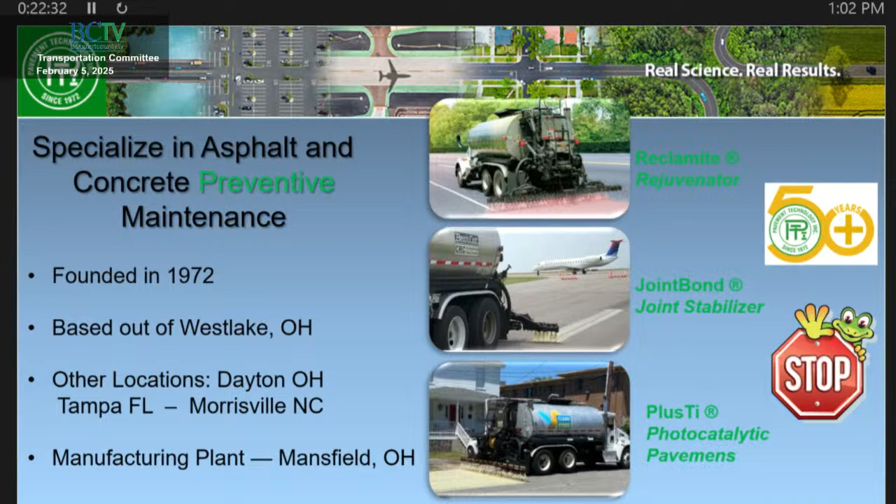All right, so myself, my name's Ken Holton. I was a city engineer for 24 years. I handled streets and drainage for a little town called Tampa, Florida. Pavement and asset management is just a big piece of what I had to deal with because I had a lot of inventory in a small space, and it was all urban. I had very, very little rural infrastructure.

My agency had decided before my time that they were going to be involved with pavement management and development of those tools, so we were a partner with the development of Paver. That was the Department of Defense, Federal Highway Administration, and then airports around the world, as well as some of the municipalities. And from way back in the mainframe time, in our case, you could only house about 5% of the network.

So I've been involved with pavement management. I grew up with it in my time with the city. And then a guy you probably know, Richard Turner, he kind of wrangled me in to help rewrite this roadway maintenance guide for the American Public Works Association. So I'm one of the contributing authors for that.

We all know the pavement deterioration curve, all right? But if we start with this curve and you think about what is the worst way to manage your asset, well, it'll be from the bottom of the curve. And Tim, down the bottom of the curve, full depth reclamation, are we at $40 a yard? 40 to 50. All right, so if you think of every little 3x3 patch of pavement that you have, if you were to manage it down here at the bottom of the curve, you have to spend between $40 and $50 just for every 3x3 spot. That's crazy.

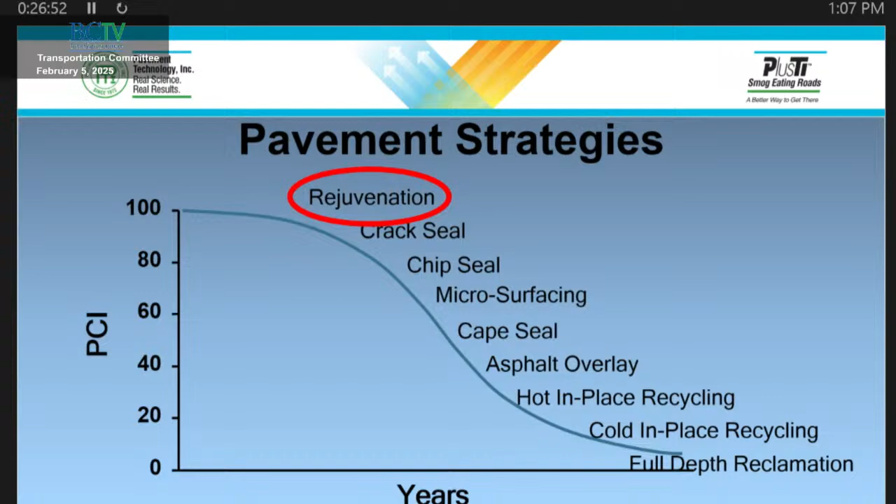Asphalt begins to deteriorate at the plant. We know that. And actually, it's deteriorated a little bit before that, because we're trying to recycle some of the aged material back in and try to reclaim some of the binder that's still useful. The aggregates are still good, but you still have to recoat them, and then we're trying to make up some of the old binder. What's interesting about asphalt is it's plastic. When you heat asphalt, asphalt will move. That's one of the characteristics.

That's why we can put it through a paving machine, and then when it cools off, you can drive on it. But being plastic, it goes right back into this drum right here. They heat it up, and then it recoats the rock. You add a little bit more asphalt cement to it, and then you're hoping to get some reclaimed asphalt cement out of the old RAP that's in it.

And what DOT, what's the percent you're allowing here? 30? Do you know? Not sure. Okay. So some DOTs and some agencies will allow 40, and they're trying to go 50% RAP. And I'm seeing those pavements show that they're already 10 years old in less than 1 year when we do binder testing. They just are so hard and so cracked. They're not holding on to the rock like they should.

So in South Carolina, we're seeing, once you get above about 20 to 25%, you really start to see a hardening effect of that asphalt that's not desired. All right, but that's what's happening here at the plant. At the plant, you're also above 300 degrees, and you're starting to drive off the magic word, maltenes, which are the glue inside the asphalt cement.

We put that nice road out there. We love it. It's doing great, but it's going to oxidize. Some of those oils are going to escape the roadway. Some of those oils are going to convert into asphaltenes, and what's supposed to be the glue of the asphalt is going to start getting out of balance. When it gets out of balance, that's when you start seeing distress to the pavement: cracking, weathering, raveling. It's as simple as this process right here to put those maltenes back in.

All right, so there's an emulsion in these trucks. The material has to have a dye in it. So it has a pink dye in the material that Brian's been using here in Beaufort County. That's a pink dye, a very manly dye. We love it. And what it does is let us know that all those nozzles are working, that we're covering the road in a fairly uniform fashion, which is what we need.

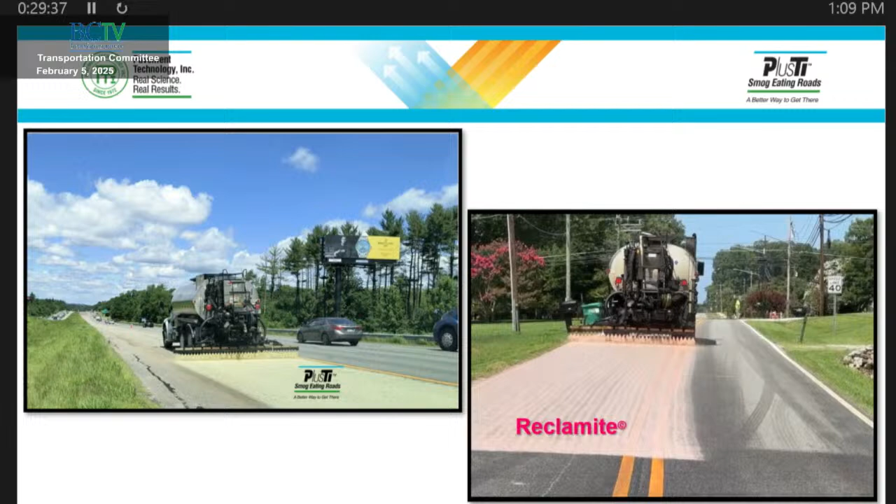And then that pink color does go away quickly as the material penetrates the roadway. The titanium dioxide material is actually yellow. And again, it's just a quality control effort so that we know it's working. And in this case, we're treating shoulders of a major highway.

So maltene replacement technology was developed in the late 50s. This is kind of a quick history lesson. Developed in the late 50s by Fritz Rostler. What he was trying to figure out was, asphalt binder has held up for years and years, like thousands of years actually. Some of the old Roman roads actually had some asphalt in them, and some of it was still there. It wasn't all just cobblestones. You found some asphalt there.

But what he asked was, why are our asphalts aging? And what are the components in there? Because it's mostly rock. Why is it coming apart? And what he found out, by separating out the binder part, was that there were these light oils and resins that do deteriorate over time, and they're called maltenes. So when they oxidize, that's when you start getting distress of the pavement.

The purpose of maltene replacement is to put in what's lost, not dilute what's left. So we don't want to just soften the asphalt. We want the asphalt to, yes, be a little bit more resilient, more flexible and adhesive, so that it can bend, it can be a little softer. But we want it to be durable. We want it to stick together. We want that glue to be in there. And the glue in asphalt is maltenes.

Right, and we found that in many places, in my own program as well, if I treat the road early enough, the road stays in great shape longer, and I can actually treat that road 2, 3, even 4 times, depending on how well that road was constructed.

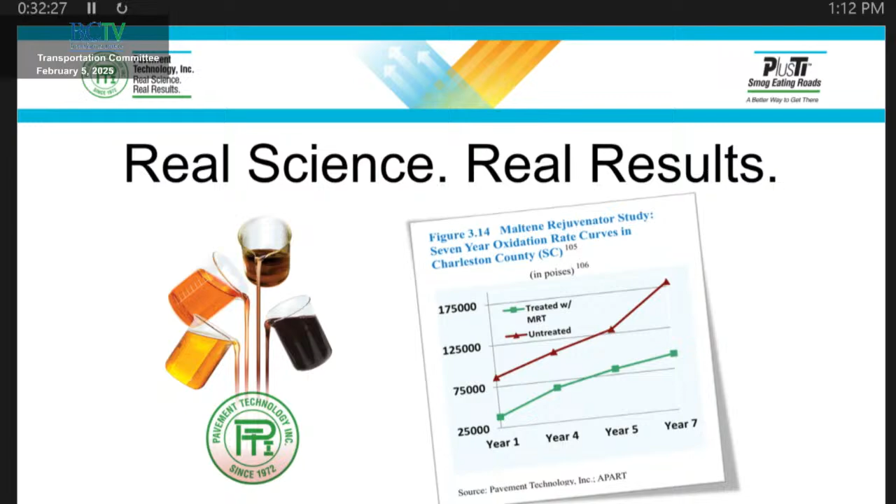What the green line is showing is we quell that steepness of the curve. We slow that deterioration down. We push the curve out so that you have a much better road longer. What does it look like to you when you drive the road?

So think about the oxidation, think what's really taking place inside the crack of the road. I'm going to show you, everyone's familiar with van surveys, these are vans that drive down the road with fancy cameras and crack mapping equipment. This is what you're going to see here.

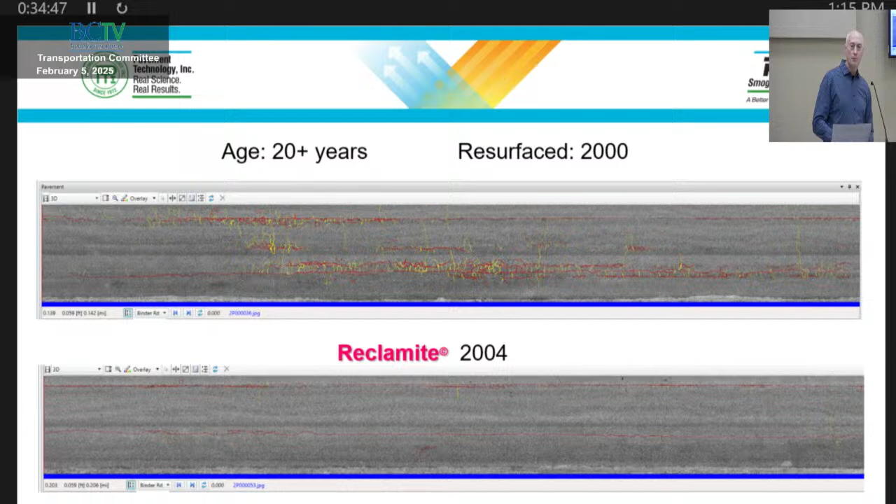So the county actually saw this, and just under 1 year ago, they resurfaced this road. I said, there goes my test strip. And they said, that's okay, go put another one out there. So in December, we put another test strip out where you see this one. So we're going to just repeat this process again. But this is what it can look like, slowing the deterioration curve down, just by something simple as a preventive maintenance.

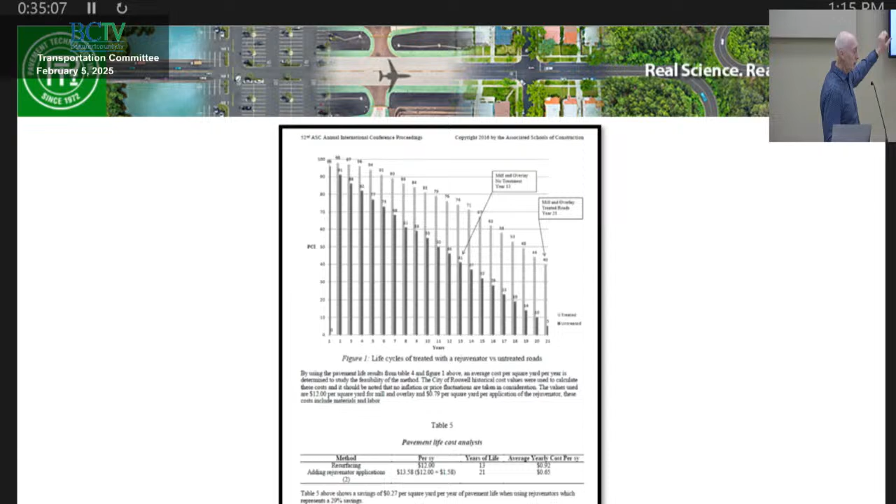One of my customers, Joe Vitale, he is in Roswell, Georgia. He was getting his master's degree. This is the resultant page, the real meat and potatoes of his master's paper. And so what he noticed was his roads, he'd pave them, and they would deteriorate along this line right here. He'd get about 13 years of life from paving to having to repave it again.

If he did preventive maintenance, and that was it, reclamite, and he did it at year 1 and year 6, so 5 years apart, he would follow that curve at least out to the point where he measured it, and then he estimated it would drop off after that.

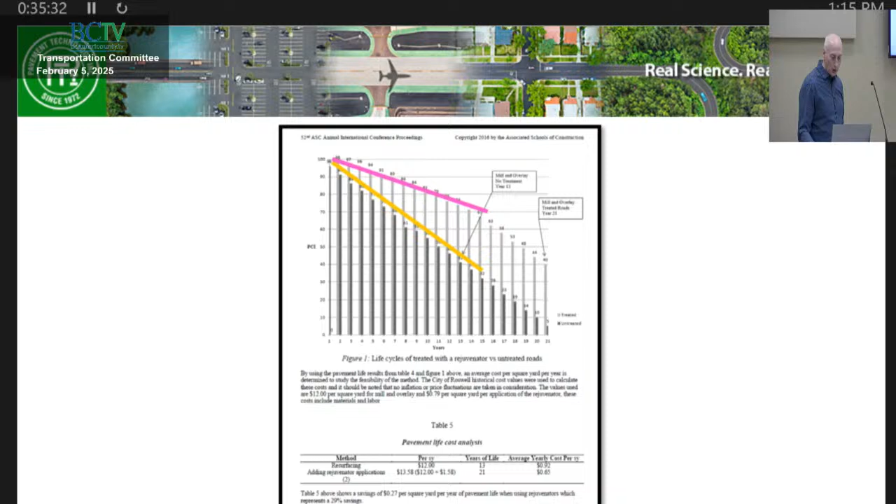What Joe did was not just look at the deterioration. He said, let's look at the numbers, let's look at the numbers, we want to know where the value is. So he added up all the numbers, divided by the number of years that he was getting, and what he found out was, and here's the big key, his operating cost of that roadway went down 29%.

He was saving or extending the life of his roadway so well that he was getting a 29% reduction in cost. So without the material, let's say he was having to spend $1 a square yard a year, now he's only spending 29% less, what would it be, 71 cents a square yard a year. All right, so that's

basically what Brian's going after for you guys. How can I lower my annual operating cost per square yard of my road on average so that I can fall within the budget or not need as much budget?

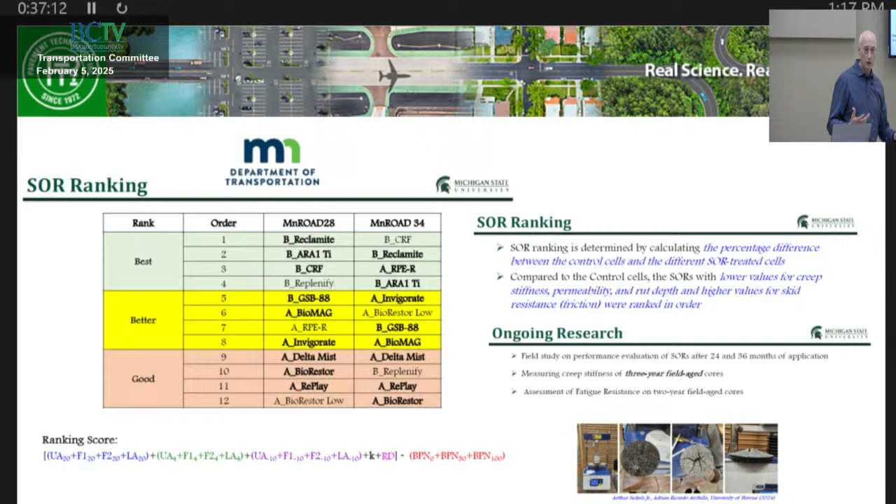There's been a lot of product testing. A lot of companies want to come out and say, hey, we have a rejuvenation product, and so there's a lot of testing going on. This is from MnROAD. What they found out was everything that's up in green, that's a maltene type rejuvenator, and those tend to do very, very well. If you're not a maltene type, at some point you're going to accelerate the aging and actually age faster than an untreated piece of roadway. So be very cautious of what you use as a rejuvenator. But what we found out was Reclamite and our ARA stuff that we're going to talk about today, they actually perform the very best out of all the products.

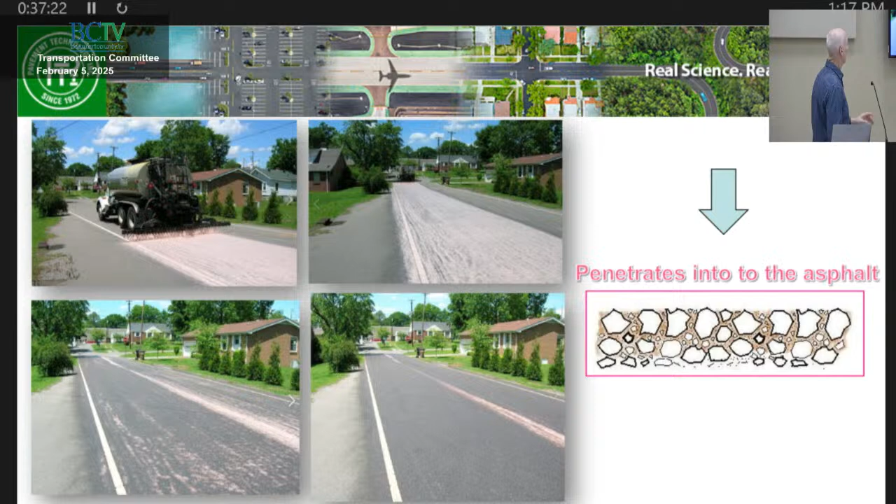In theory, if you see us working, it's going to look something like this. Our truck runs down the road, it penetrates into the roadway. Pink turns to translucent, we don't obliterate the markings, so you don't have to restrike the roadway. That material goes right into the roadway, nothing resides on top for very long. Once that process happens, we put a light aggregate down, and then we sweep that aggregate up, typically the next morning.

So this is kind of the whole process, usually done process-wise. You want to go back to slide 10? Yes. So talk a little bit about the bottom right picture.

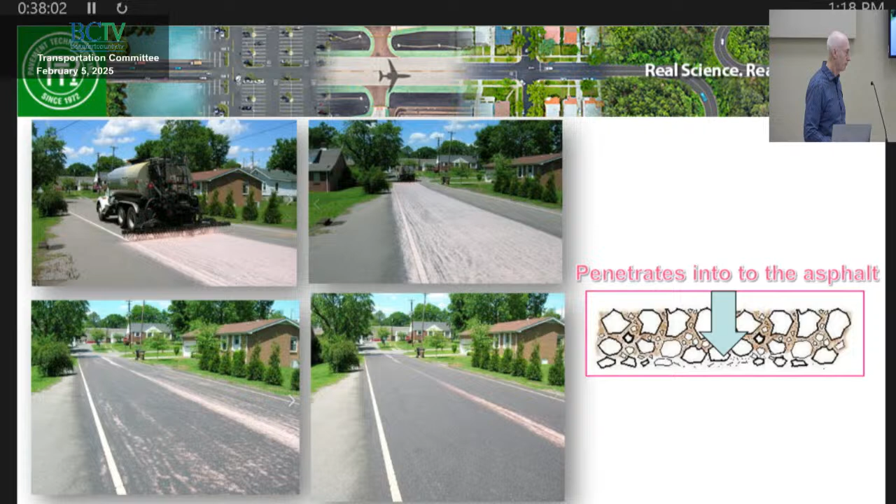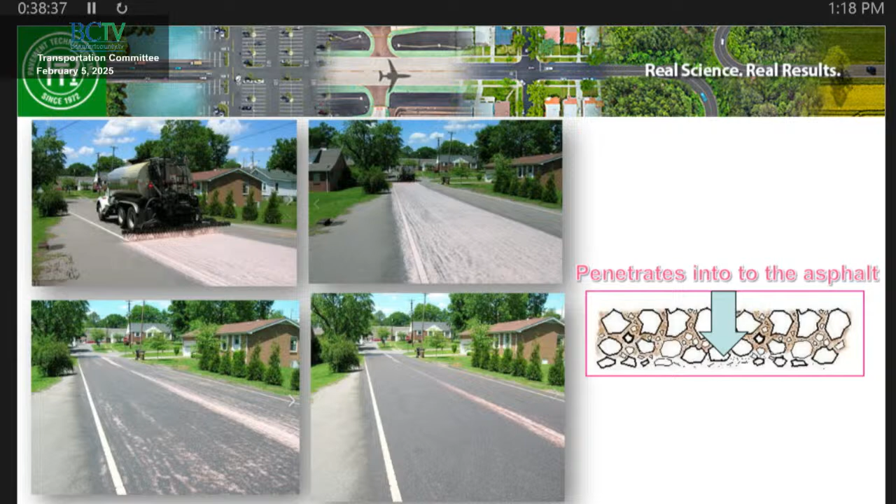Good question. So on the center line, we overlap that center line, that is the paving joint, that's the weakest piece of this pavement. So our protocol is overlap the center line, and that would be the last area where it got hit twice. We put more material into that center line. Typically, if I let it go, you can see it's already quickly absorbed on that center line. We do try to overlap 1, 2, 3 feet in that center line area, and that's why joint bond was actually developed.

So that's our whole process. We sweep it up the next day, and that material will leave the road a little bit darker, but within a couple of months it's going to gray back out to its original color. Again, there's nothing to rub off or wear off, or cause an eyesore for any period of time.

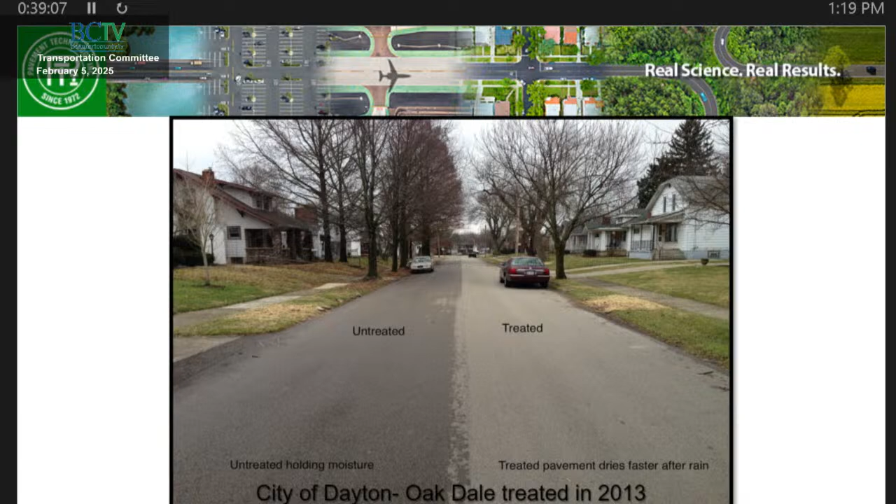What does it look like over time, what can you expect to see? This is a road that was paved, half the road was treated, you can see on the left the moisture hanging out. So basically it's a penetrating sealer, the material goes in and basically swells or rehydrates the asphalt, it makes it dry quicker. That's part of, not the only reason, but part of the reason why you get less deterioration.

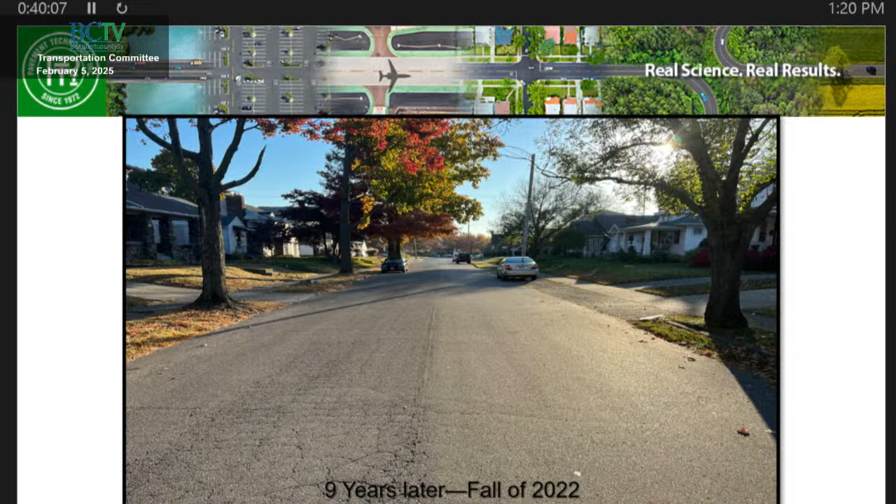Fast forward 9 years, can you see the age difference on this road? This side's pretty bad, needs to be redone. The other side is actually showing some distress after 9 years. This roadway was in pretty bad shape, I think it was going to fall apart. There's something going on here, because even a Reclamite treated road should not have that kind of distress after 9 years. But you can see, even though there was a problem, by doing some preventive maintenance, you don't have that problem over the whole road. And if you do that wholesale around your paving program, then you have a better chance of saving some of the roads that might have had an issue to start with.

Here's another one, there's a series of 4 pictures, 4 sets of pictures. This agency didn't have enough money to do the Reclamite replacement everywhere, so they did some, and they lost their funding after about 10 years of the program. So after 10 years they lost their funding. This was around 2008, 9, 10, 11, somewhere in there, as the economic downturn finally caught up with them and they stopped the program. They started back up last year because of these pictures.

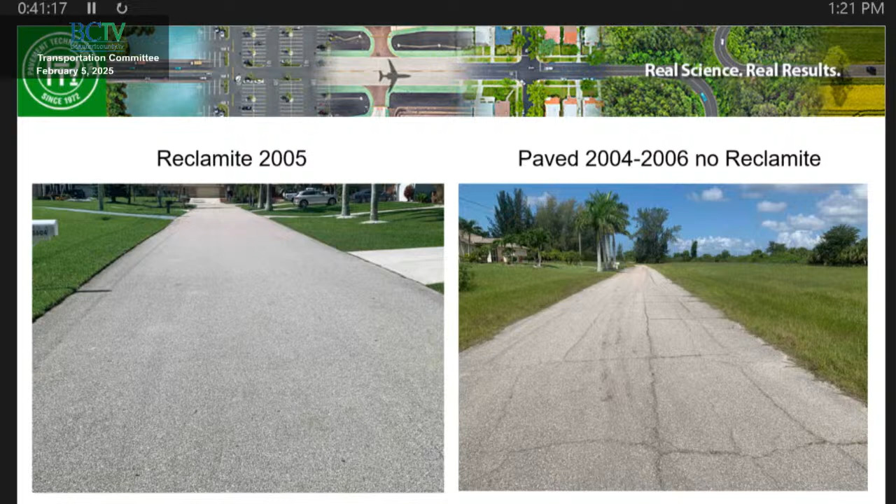What happened was they went out and said, oh my gosh, some of our roads that we paved back in the early 2000s were in really good shape. Did we work there? What they found out, the only thing they did was reintroduce Reclamite, they did preventive maintenance on the pictures on the left. Pictures on the right, same age paving, were already starting to show significant deterioration. Same thing will come a little bit earlier in life, next year or two coming forward. So you can see preventive maintenance versus no preventive maintenance, same comparison again. This is the last one - better condition where you did do some preventive maintenance, and not so good where you didn't.

This is kind of what we're going after. Not all roads are going to act exactly the same, but if you just have a way to do some preventive maintenance. My guess is everybody in this room did preventive maintenance today.

Did you brush your teeth? Yeah, everyone did some preventive maintenance. You don't want cavities, you don't want to take chances of anything going on. So you did preventive maintenance. You're going to do that anyway. And which teeth did you brush?

All of them, right? So for the most part, if it's asphalt, this material is going to help asphalt. That's kind of what I think Brian is going after. As much as he can, he's going to try, because we all know things happen. Every once in a while you might get a cavity, or you might need a crown, or you might have to do something. But here you are with your asphalt pavement. Not all things are going to act the same, but overall, a little preventive maintenance is going to go a long way.

Ken? Yes sir. The last time you were here and we talked about it, one of the questions DOT had was concern over surface friction after it's been done. I know the answer, but I'm bringing it up so you would talk about it. There was always concern about surface friction after it's done. So we are concerned about that, and the light aggregate that's there, this is a petroleum product.

Now, how many times have you seen it moved along? It will go, right? I mean, Buckwalter Parkway, it went half a mile, okay? So it looks like, I'll say it looks like an eyesore. You look down and you're like, oh my gosh, it's like tracking down the highway. What did we do? So it looks dark where the wheels are going.

Well, that's just picking it up and moving it along, so it's not there anymore to cause a friction issue. That's part of high volume - it just moves it along. But also, if you stop and look, you see a dark track, and you look straight down, you see right through it to the pavement below. It's not like a tack track. As soon as it rains, that just kind of dissipates pretty quickly. That, and more traffic. Does that answer well enough?

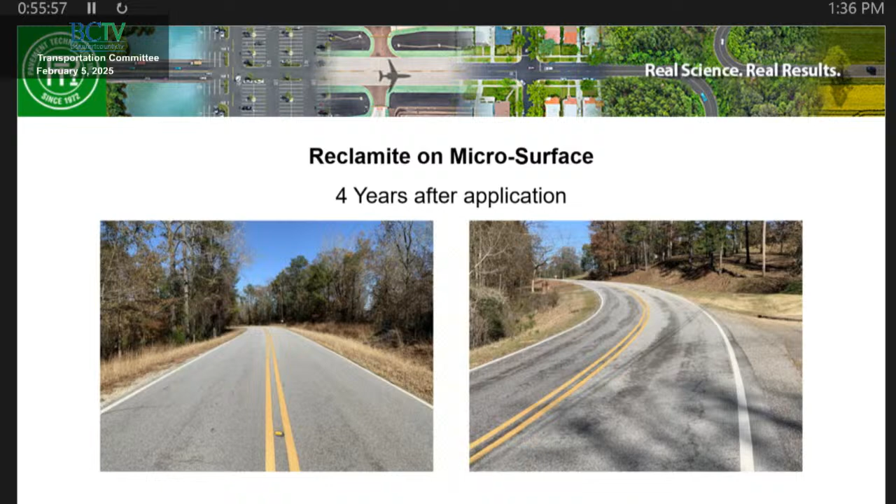All right, where can we put it? We can put it just about anywhere. We already talked about a lot of it, but definitely shoulders, rumble strips, centerline joints - it's not intended, without other treatments, for the travel lane of high-speed or high-volume roadways. But if the DOT would like to put it there, then we'll have to talk about it - that's a whole other project scope. We're happy to talk about it, but yes, sir - impact.

What's the best methodology? Reclamite is one of those tools that they're looking at, along with.

Yep, great segue, because guess what? Boom. All right, here we go. So here's some rumble strips. All right, so this is where you cut. Basically, you can see the paving joint here, on a very low, compromised, dense area, most likely of that pavement. And you can see right down, and I'll just walk over here. Right behind the machine. That's less dense.

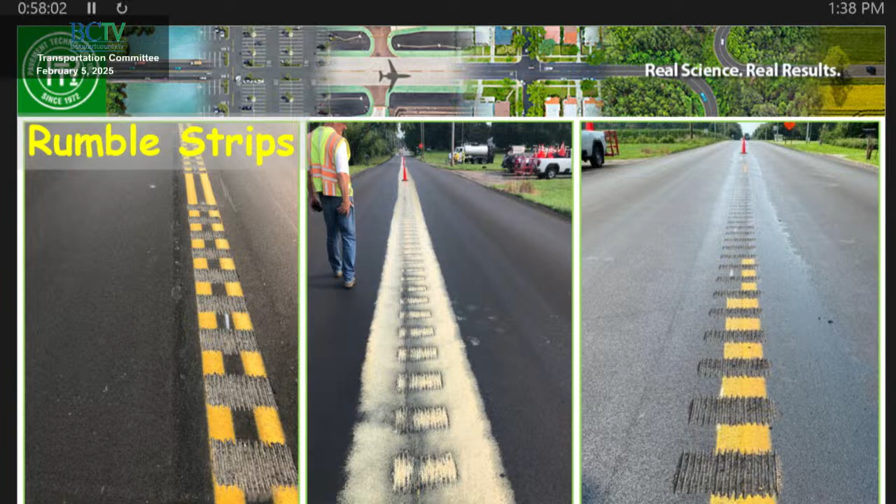All right, we worked with PPG and North Carolina DOT, and one of our goals was to find another solution, maybe a faster solution to get this down. So PPG, a big paint company, probably the largest paint supplier and markings manufacturer worldwide, wanted to make sure that what we do with our joint bond material, either on top of or underneath the markings, did not change the color value. Change the color value, you change possibly how people view the marking. It's yellow for a reason, it's white for a reason. So they wanted to make sure that we weren't changing some of the real characteristics that they needed,

as well as the reflectivity. So what we've done in a couple of different states, North Carolina is one of them, we put the joint bond material through a paint machine. For this short of a run, this is about 1,000 feet. We didn't have a long line truck come out. We did it with a hand liner. But what we did is two different areas. This was less than 30 days after the mumble strip was cut, the markings are put down permanent. So to a paint manufacturer, putting a product on top of a brand new marking is like sacrilege. So that's why they were out there with us, and you can see that's a PPG vest on the guy running the paint machine.

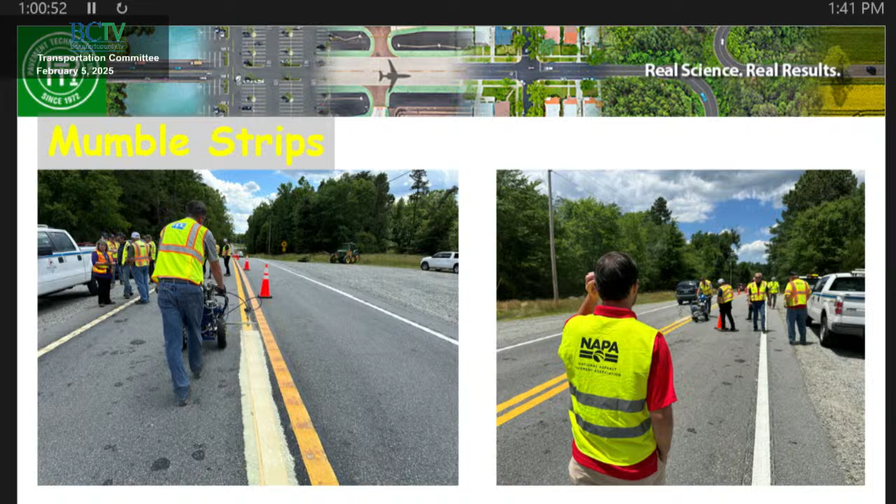What was very interesting as well was on this same project in a different area, we cut the mumble strip, we cleaned it, shot it with the joint bond, and then a couple hours later came back and shot it with the long line paint. And adhesion testing, they've got these little devices they put underneath the marking, and then they pull the marking to see how well it's adhering to the roadway. They actually found that the marking adhesion was higher in the joint bond treated area than in the untreated area. It surprised them. So thanks, Tim, for bringing that up.

So here's just a couple examples of what you can do. Joints, you can see the joint. Here's a joint that was treated, and you can see the weathering. The moisture's not penetrating or staying. Shoulders are a great place. Of course, we already know neighborhoods. Things you already do here are great places. Now we're going to start talking about the titanium dioxide as one of the other co-benefits.

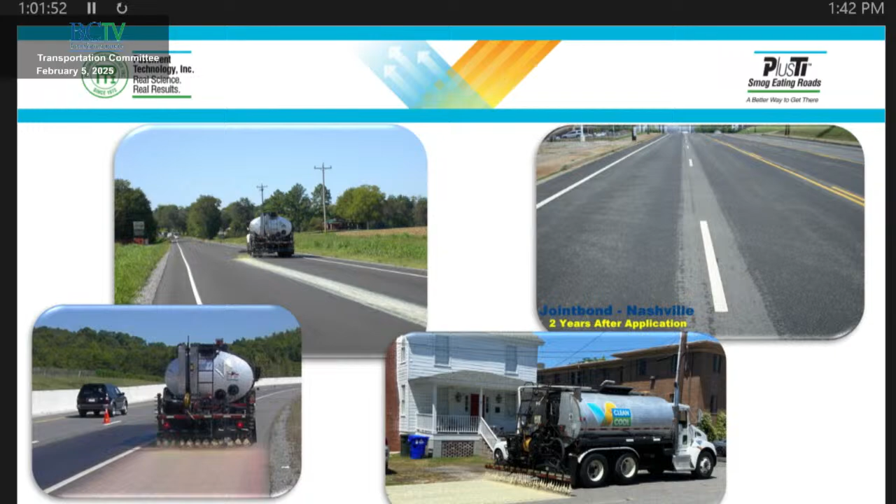So do you have any questions about markings? Y'all have asked some good ones. So thank you. I don't know if you're going to hear this, so I may just move on.

Because small forests can remove the emissions of thousands of cars every day, but we don't have room for forests where air pollution occurs. What if cities used roads treated with pavement technology? TiO2 is energized by light. Millions of electrons create an energy field atop the road. Pollutants are captured and oxidized instantly.

You like our commercial? All right. So this is kind of exciting. I'm an environmental engineer with a civil PE, and it was kind of funny when I came with the company. They knew me as the guy that bought Reclamite for the city, and I went up to the office and I'm like, "What's that?" And they're like, "Oh, that's a patent." I said, "What's the patent for?" "Well, it's titanium dioxide." "For what?" They were kind of coy with it.

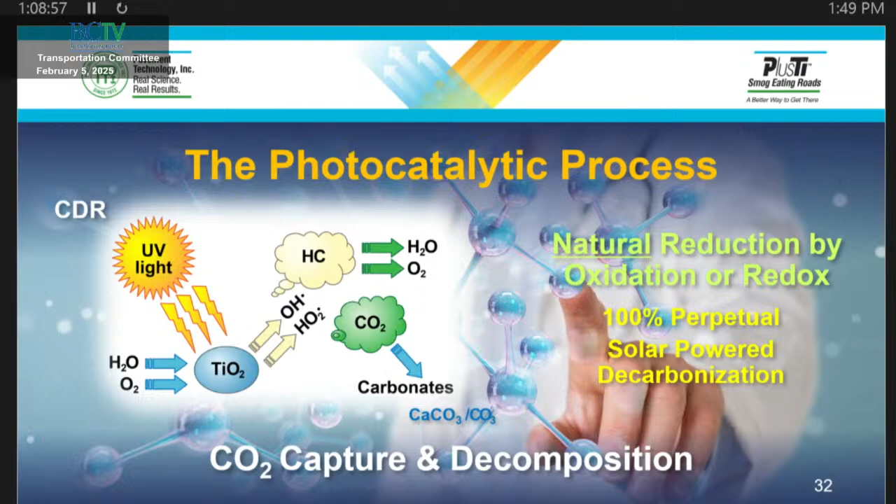So this is what's called an oxidative reduction reaction. All right? Y'all can go study it later tonight. But that's what's happening, is we are creating an oxidizing environment to break down the pollution that's there. All right?

All right, we developed it because I'm going to tell you, there were a number of things out there. I just mentioned on the overhead thing, but mobile source pollution, that was where we thought the market was most headed to. You needed vehicle emissions broken down. We have, I forget what the federal highway, it's a grant that most DOTs got. Basically, you did intersection improvements with it and things like that, just to keep traffic flowing, not sitting still.

Carbon reduction grant? Well, the carbon reduction, that's the most recent, but there's a congestion mitigation, whatever it was, that grant. All right, so that was doled out by the DOTs in every state. They got the congestion mitigation grants. So we thought this would be a great use of that funding source. Let's treat some of those areas where you can't, unfortunately, mitigate some of the congestion. You don't want idling vehicles sitting here, and we can clean up quite a bit of that exhaust.

What we found out in our research is that about 26% of all the carbon emissions were actually coming from our transportation. Okay, so there's other reasons that we have it: heating, electricity production, those kind of things. That's a big piece, even bigger than roadways. But just the roadways and transportation, airports, about 26% is coming from there. So that's where we can influence.

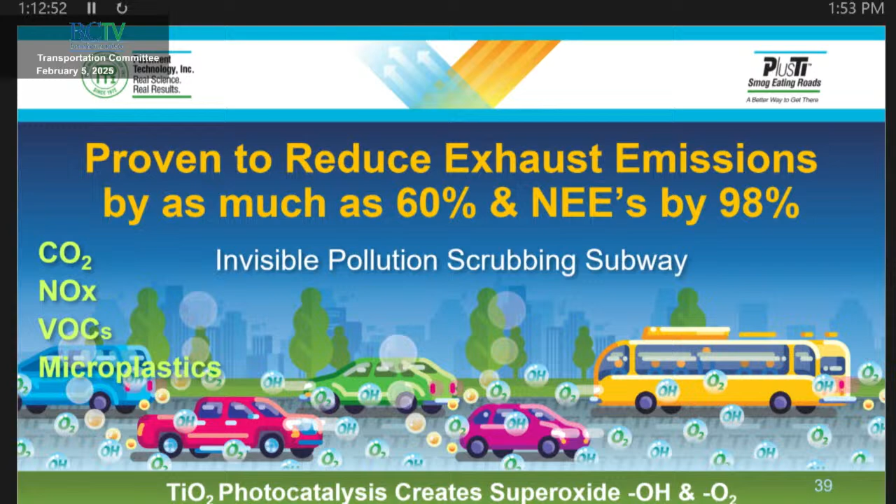So what if we could actually start not just mitigating the carbon footprint from the cradle to the gate, so from production to implementation in the field? What if we could actually go to what's called scope 3, which is unintended material coming across, or use phase, the intended use of the infrastructure, lowering the carbon footprint, lowering the pollution impact.

All right, so that's where our products come in. We have very, very low carbon footprint. It's like less than a kilogram per square meter. But we clean up many, many times that. We clean up tons a year per mile of that carbon.

So that's the research that we're doing. How much? We're quantifying those things. So we're looking at the use phase.

The big question comes, and Brian and I have been in lengthy conversations concerning the carbon reduction program that's funded through LATS, and that's where the money's coming from, not through DOT. The big question is, we're going to do 2 of our county roads this year with titanium. You have the contract for it. We'd like to do some of the state routes with the carbon reduction program, and I think we can get money to do it.

A good example would be 170 and 278. That intersection always has traffic backed up in it. And there's other intersections that we can pick throughout the county, or areas we can pick out in the county, on Hilton Head as an example. What do we have to do to get your blessing to be able to do this?

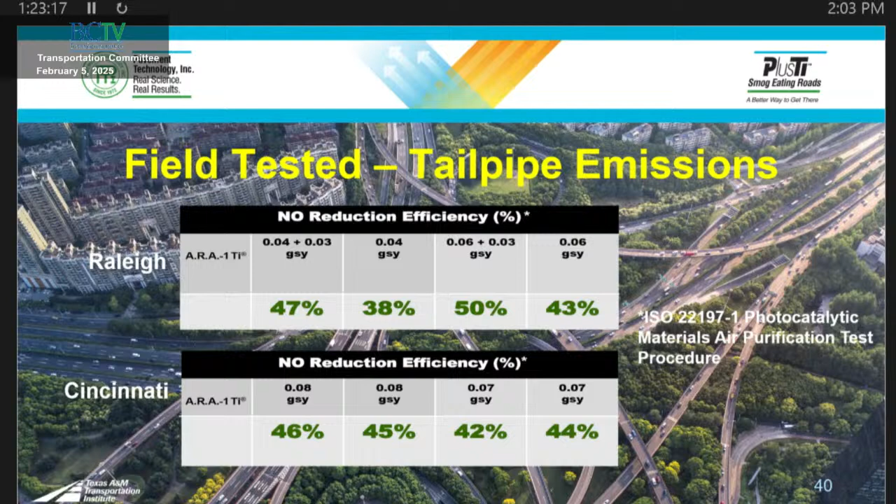Just like the maltenes, it's Mother Nature's way of taking care of asphalt roadways. Titanium dioxide is one of Mother Nature's ways of cleaning up the environment. So these are some of the results in Raleigh: tailpipe emissions were reduced in the mid-30s to 40%, up to 50%.

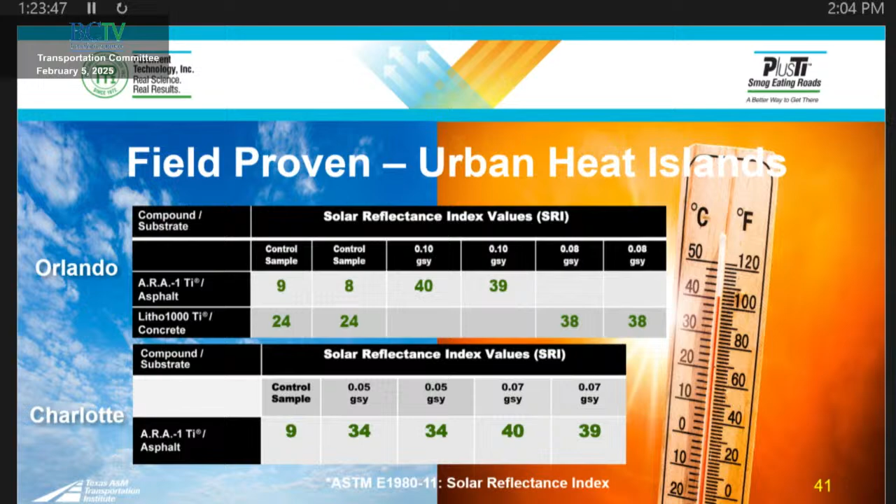Heat island, we've been studying this for quite a while. One of the targets here is a 9 and an 8 - that would be a solar reflectance index of a hot mix asphalt. You want to get above 29 to say you're influencing the solar reflectance index to LEED, U.S. Green Building Standards, or Institute for Sustainable Infrastructure, and we're getting into the 30s and 40s easily. So we're influencing the heat island effect in a positive way.

What does that look like? You have a roadway, it's a hardscape - the heat radiates in during the day, and then when it begins to cool at night, it re-radiates back out. With titanium dioxide, remember the chemical process? We throw an electron, and that's actually taking some of the heat. Energy is not created or destroyed, but it is converted - we're converting it into an expending of an electron, but we're also redirecting, because the titanium dioxide has a faceted face like a diamond. It's redirecting the heat out in many directions. So less heat's getting in to cause a problem during the heat island phase, or the nighttime phase.

You mentioned that it meets the ISI standards. Yes, so does this, for a roadway project. Yep, if you want to go Envision, we'll help you get there, because we're Beaufort County's Envision certified agency. We've already been part of a LEED building too, so look for that to be a growing market as people want it.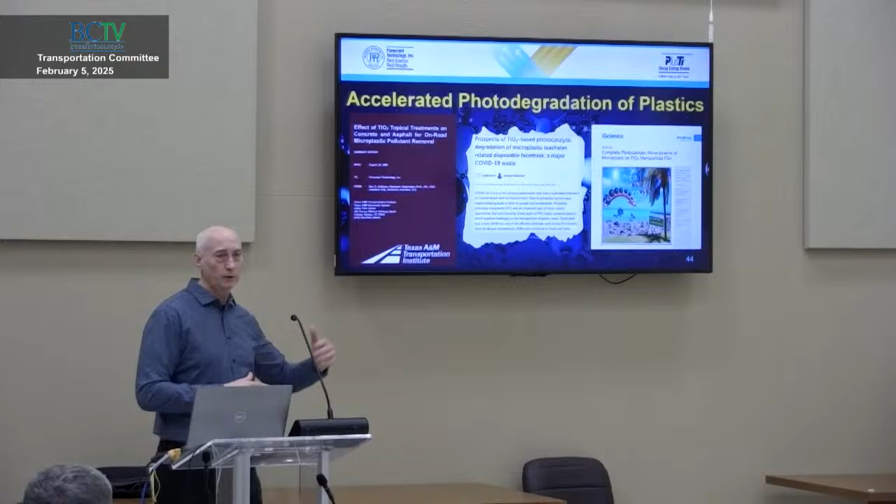These are just some of the things we're testing - microplastics. I'll show you some quick pictures. A big stack of tires is converted basically to nothing, and when you look at it under an electron microscope, you have these little spheres that get basically dissolved away. So it's beginning that oxidative process for the microplastic itself - it's kickstarting Mother Nature's process.

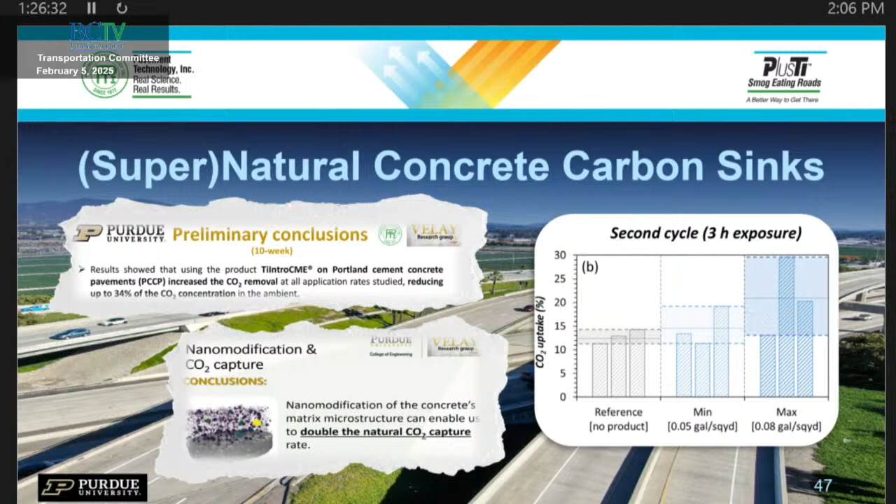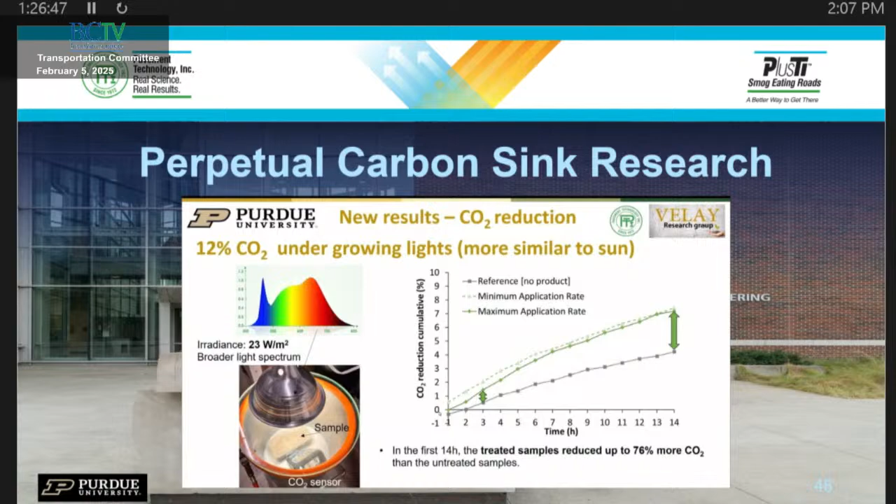Purdue is going to send us the link to that within days. It's not published, going through final review, and expected to be out in a couple weeks at the most from when I got the email. So it's been presented.

Preliminary testing - asphalt, this is concrete, right? They've already started testing asphalt, same results, very similar results for the reduction. So this is the first of many, many, many papers that are going to be coming out on the benefits. They're testing asphalt CO2 reduction, and also testing microplastics on concrete and asphalt.

They've got a rhodamine dye test, if anyone knows anything about that. Basically the rhodamine dye is put on the pavement, and if it starts to go away, it means it's being oxidized; if it doesn't, it's not. On a TiO2 treated road, it's going away - so that's a microplastic of sorts. This is coming out, it's very exciting. We've already been through what we do, very simple application, again.

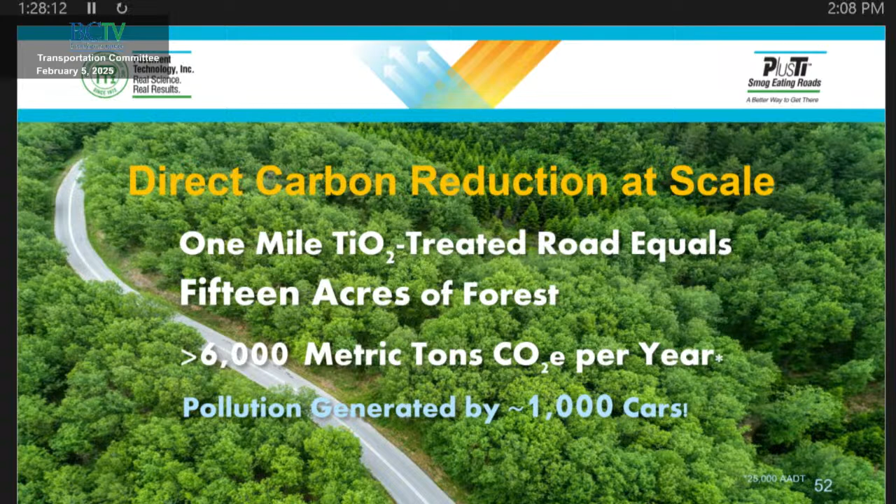It is a way to bring those forests into the urban environment. We have a whole set of products that we can help you with, depending on the use and where we want to put it.

It goes and penetrates in. This is the only reason I have this slide here: we're looking for a certain amount of material towards the surface, and then we want to show that it's penetrating into the pavement so that it's there as the pavement begins to age and wear away. So it's there, and it'll be sustained.

This is actually Greenville, the first one here in South Carolina doing the work. After 5 years, we still had 88% titanium dioxide retention. So it's there for a long time.

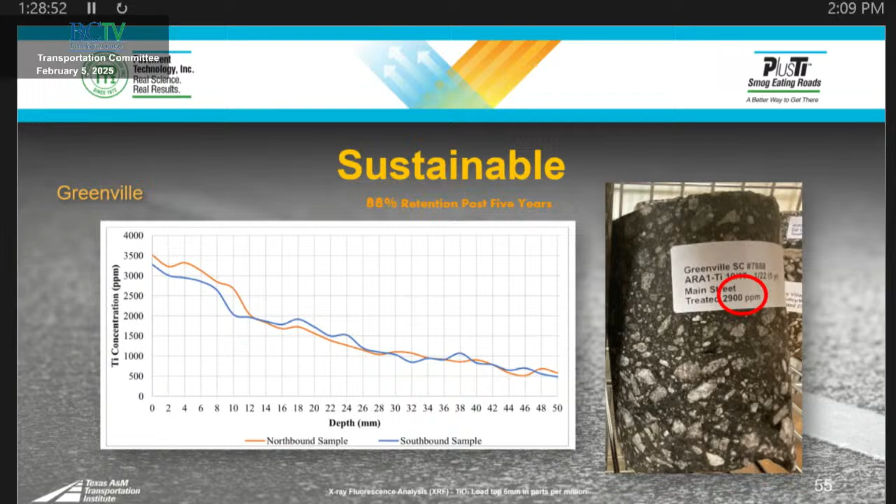Proof is there with all the excitement. On the EPD, we are fixing to publish our EPD, period.

We've done EPD, which is the industry standard, cradle to gate. We're into the use phase, which nobody else is. Because we don't want to just go cradle to gate, we want to go all the way to the end of life, to the grave. We want to show what we're going to reduce on the use of that asset. That's a whole lot more complicated for the industry to do calculations on.

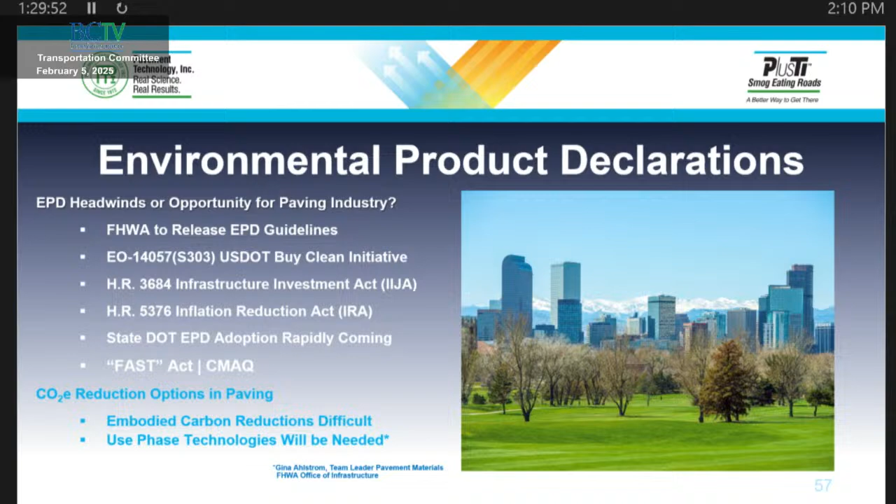It's taken us now about 1.5 years of going through all those calcs, but that paper I just showed you is being produced. That is one of the last nails in the coffin to get it done. I think you'll see our EPDs, not just for what it takes cradle to gate, but cradle to end of life, very, very soon, like within a couple months at the most.

Here's some of the agencies we work for. We do work for hundreds. This is Massachusetts DOT. MassDOT had us do shoulders going in and out of Boston on quite a few roads this year, I think it was 130 miles of their roads going in and out.

And this is one of the photos of what we do. We just keep the traffic off of us. Next year, we're going to start migrating out into that travel lane. They've already given us that project. I think we did a little bit of tunnel work as well.

So UV light in the lights in the tunnels will help oxidize pollution in a tunnel. How many tunnels? It's kind of where we're going with some of this.

So that's really it. Any questions on our titanium dioxide? Yes, sir. How much does the TiO2 cost add to the maltene price?

Yes, sir. How long does the application last? So longevity, the titanium—in Greenville, we still have about 88% of what we put in the pavement to start with still in the pavement after 5 years. So I expect it's doing something, it's still doing its job there, but I'm going to guess it'll still be doing something at the end of 10 years. You'll still be getting some benefits of it.

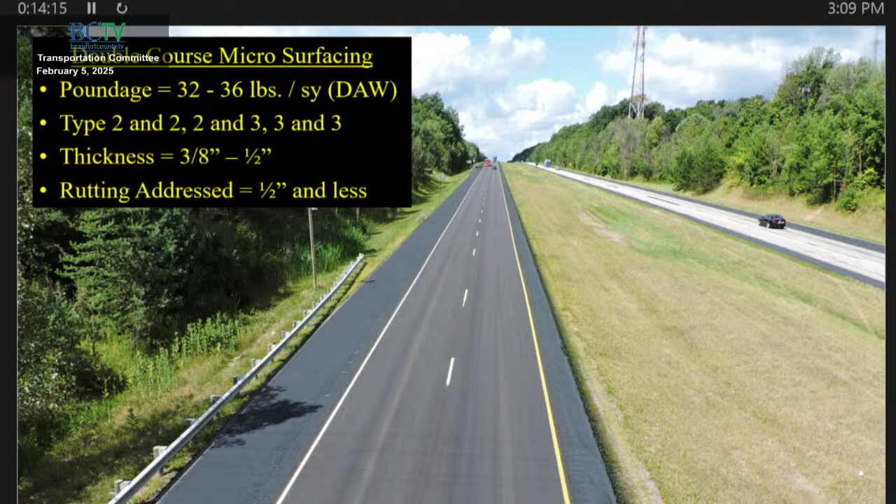So I think that doing it the right way, we start from scratch, we do it the right way, will yield what you're looking for in maintaining what you've just built the past 10 years.

Examples: City of Durham, I mentioned their program this year—like I said, 7 this year, 10 next year, 10 in 2027, 10 in '28. They're doing a bunch of maintenance.

They do crack seal. They do the polymerized chip seal as an interlayer for their cape seal. Single course microsurfacing—they put fiberglass in their microsurfacing for tensile strength. And then they do the cape seals.

So a lot of different varieties based on traffic count, based on having curb, based on not having curb. They have a van that goes in and shoots all their roads, analyzing distress, so they know where to put these things. And they have snow too—not a bunch, but they have snow.

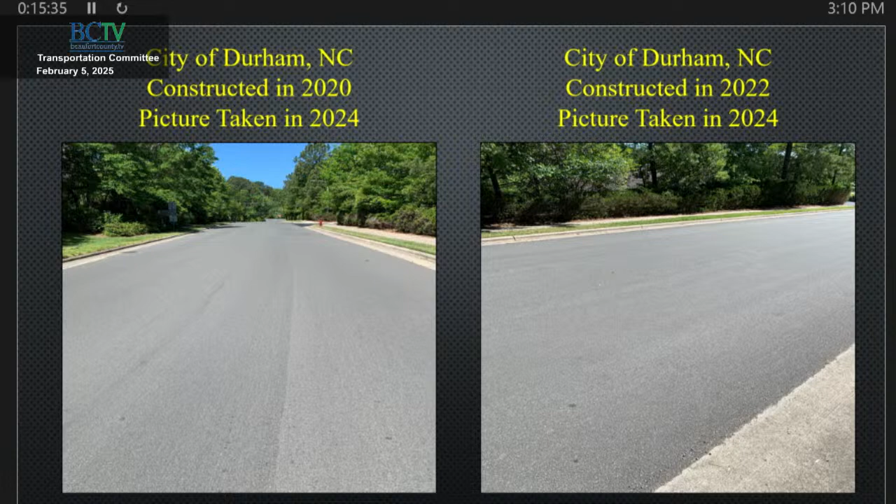With this, you do not have to mill. So we're basically feathering it right to the gutter pan. City of High Point had about a $1.2 million program. They did some single and double course.

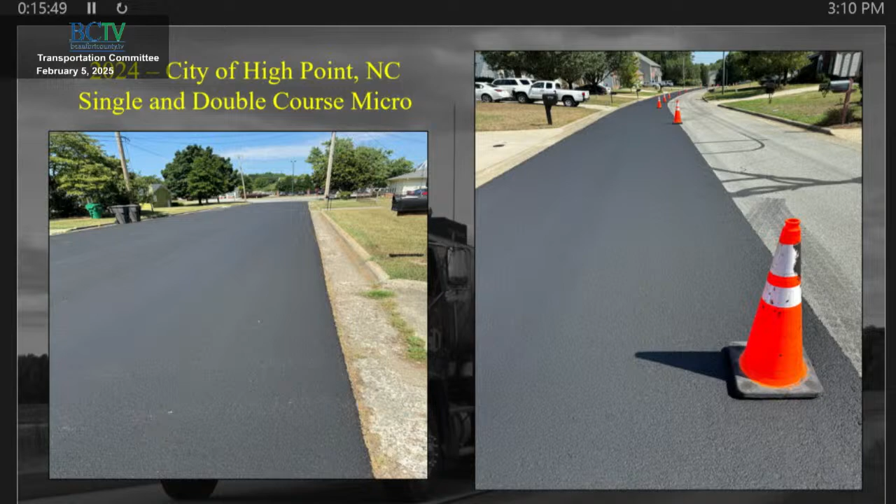City of Greenville, like I said, double course microsurfacing all over the place. NCDOT Division 1, every county in Division 1, which is basically from Virginia down the coast, received microsurfacing single and double courses constructed last year. Division 4 is over in Wilson County, went into the subdivisions with the type 2 aggregate and overlaid what looked to be old chip seals.

So the DOT in North Carolina has a lot of local responsibility. They take care of 90-some percent of the roads. That means subdivision work, kind of like you guys have subdivisions. So they went in and did a type 2 on the subdivisions and the type 3 larger aggregate out rurally in the field areas.

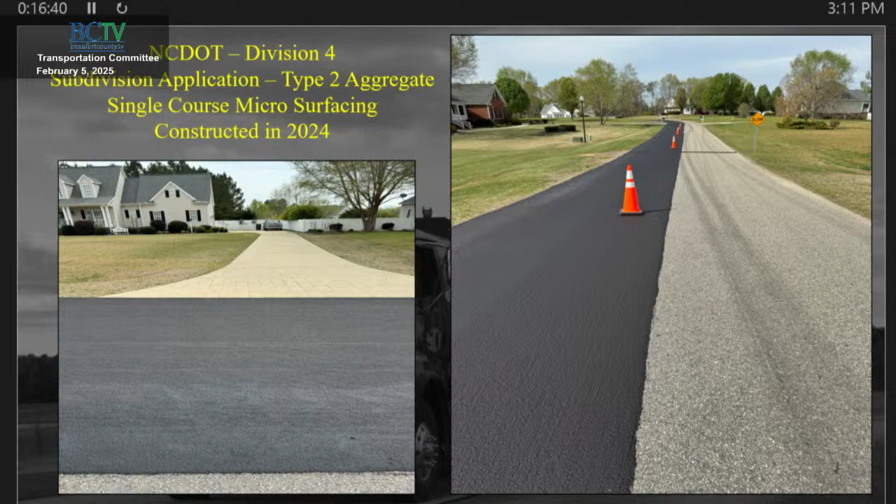Forgot about South Carolina. There's Beaufort, where we're going to go look today, on Toyota. And then going through, that was a couple years ago. And then out near the causeway, including the causeway. It's Rusty holding the sign, bottom right - I didn't get his fingers in there. So we've done a decent amount of microsurfacing in the county, and in my opinion, pretty successfully.

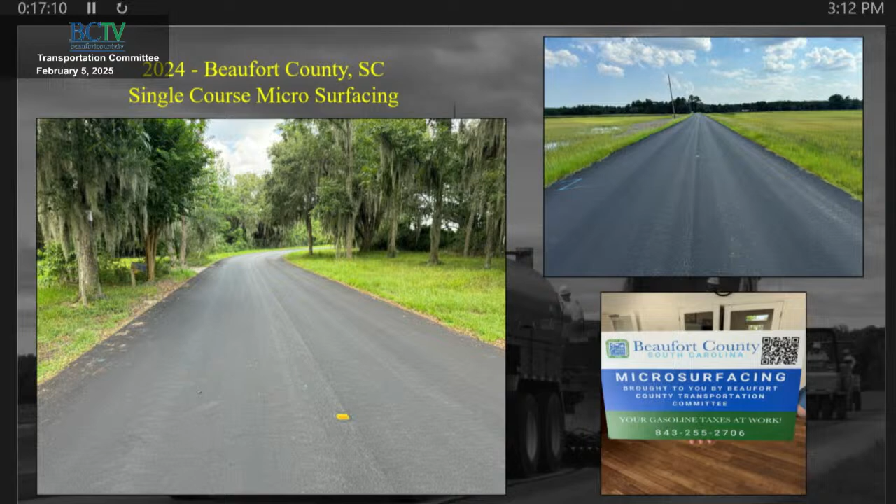And then at the state level, we started looking at doing double course micros, mainly because of their rutting. So we went in and leveled up a lot of their rutting. This year is going to be the biggest - it sold and we were the low bidder - biggest single contract for micro in North Carolina, in Division 10, which is to the east of Charlotte, Union County, around Monroe, and stuff of that nature. We're taking US 74.

And we're setting a rut box in the wheel paths. It's 5 feet wide, and we're filling up all the wheel ruts with micro, and then putting a double course over everything. 6 lanes, 3 lanes in each direction. Big project. But up in the mountains, Vienna Dozier Road, Division 9, double course, beautiful.

City of Greenville, South Carolina, basically at the technical center there at Clemson - this was what they call a high mod micro. It was initiated or facilitated through Ergon. We were the contractor to put it down, but it actually increased the latex modification from 3% to 6%. Looked like bubble gum going down. It actually slowed our motor down because of how thick it was, a couple, 3 times. But it drastically increased the price because polymer by the ton is as much as asphalt nowadays. So they're going back to the 3% and extending out where we stopped in this university area.

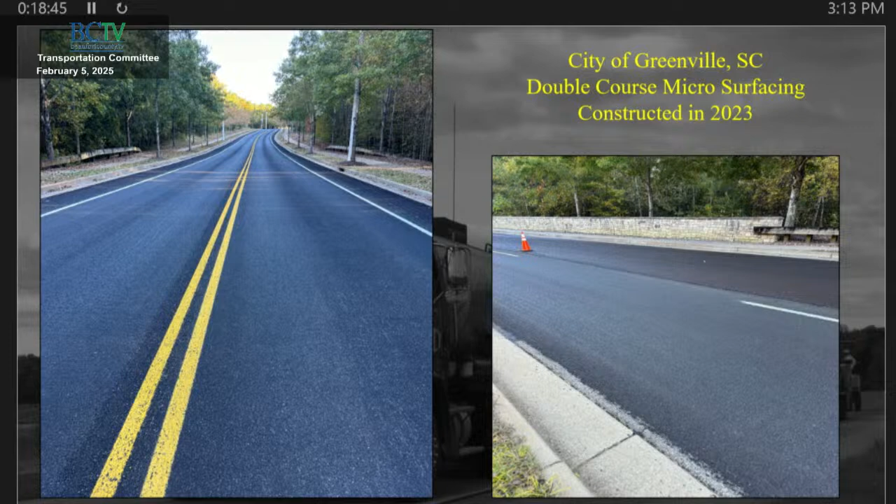Charleston County, been a great customer for years. Mackenzie there started doing - our program last year was all double courses. It actually smoothed the road out much better than the road originally.

As Ken mentioned at the onset, through the National Center for Pavement Preservation, both in North and South Carolina, we have formed pavement preservation councils, kind of a subset to act as your liaison for technical questions, hopefully be an advocate through the DOT to work on specifications. These individuals have agreed with Nick DePalma from the city of Greenville to be our president.

Ken and myself are both on it, Brian from Beaufort, Mackenzie, and a host of other academia and engineering individuals. So collectively as a group, we're here. We want to work with y'all from the state, work with y'all from the county, and move this thing forward - it's not a 'please do more,' it's 'how can we make this better?' So we're positioned to really be of benefit to you guys and a liaison for your needs, preservation-wise. So it doesn't matter which tool in the toolbox - this will be represented here. That's what I had for you guys today.

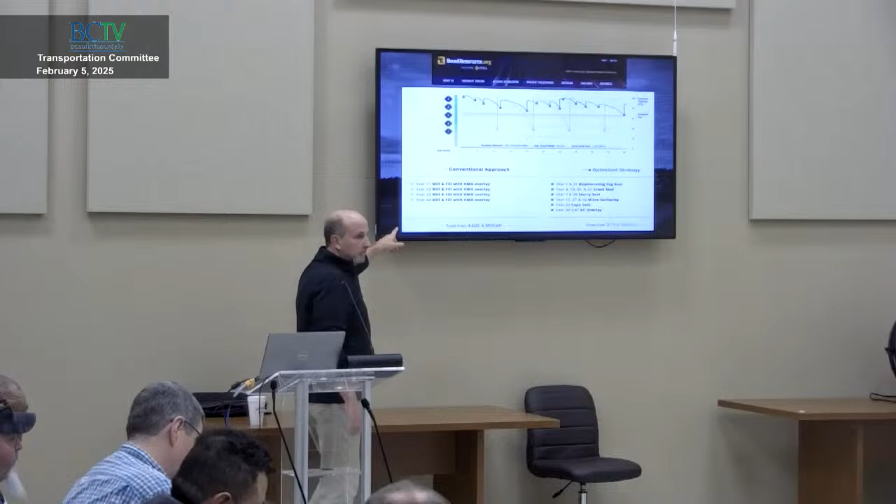That's, like you said, the brushing of the teeth, the changing the oil in the car, putting the roof on the house. It's keeping it up for a little bit of money rather than buying a whole new house, getting a root canal, buying a whole new car. Same mentality. That's on roadresource.org?

Yes, ma'am. So I guess what I was going to ask is, when you come in and do this, is there a performance issue or a warranty, like if in 6 months it all falls apart? Yeah, standard industry warranty is a year.

If anything's really going to get up and walk away, it's going to be in the first couple of months, actually, because it wasn't right. My experience in Ohio is that they used to have a 3, 5, and 7-year warranty on their microsurfacing. In my 20-some years there, they only had one claim, because the contractor paved over a mud flap and it came up. So they're like, okay, we're paying a premium for these warranties, so they just got rid of them.

So with mix designs and JMFs and all that, state-approved quarries and the right liquids, you really don't see failure like that. When we started this, really in 2016, when the committee was reformed and members reappointed to it, in 2017 we did our first road analysis. The man sitting next to you worked for F&ME and did it at that point in time.